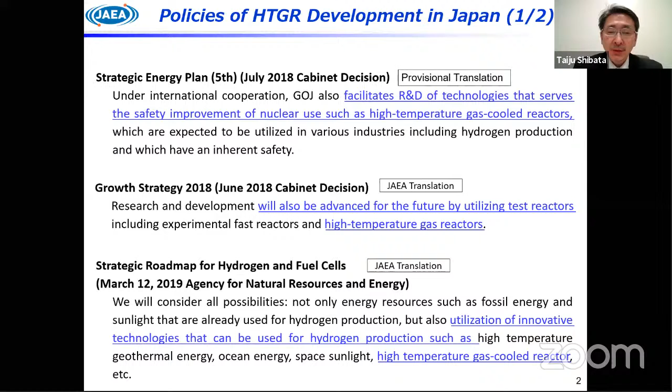In the long-term strategy under the Paris Agreement in 2019, IS process hydrogen technology is stated. The IS process is a thermochemical hydrogen production method by water splitting.

Progressive environmental innovation strategy in 2020. IS process hydrogen production and HTGR is stated for hydrogen production technology.

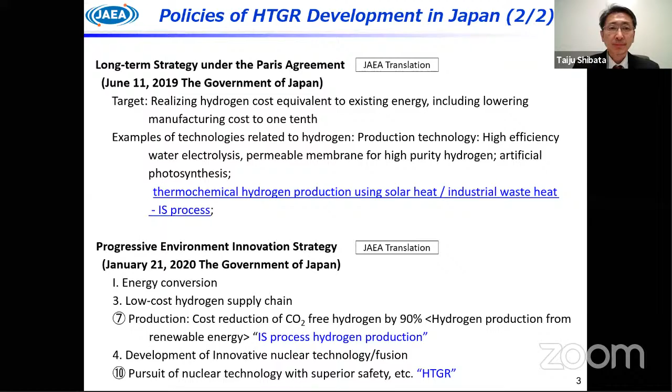This slide shows the role of HTGR in Japan. Compared to fiscal year 2013, the long-term goal is 80% reduction by 2050.

The bar chart shows the greenhouse gas emissions in Japan. It decreases gradually, but it is not enough. In 2018, the reduction is 12% compared to fiscal year 2013.

We need the breakdown of greenhouse gas emissions in 2018. 37% of greenhouse gas emissions come from power generation. 12% is from steel making. 18% is used also for steel making, transport, and chemical industries.

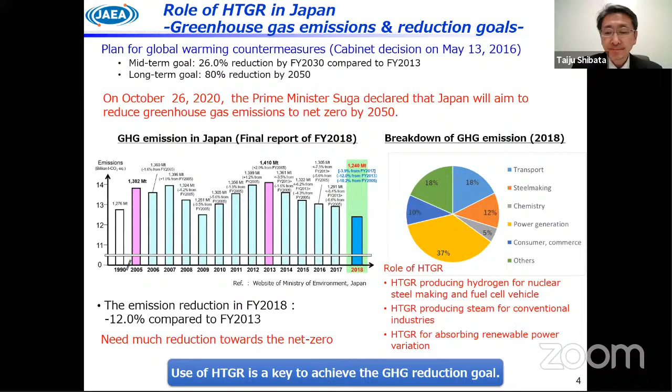Next, I will talk about the outline of the High Temperature Engineering Test Reactor, HTTR. The left side is a cutaway drawing of the reactor building, reactor pressure vessel, hot gas duct, intermediate heat exchanger, and reactor containment vessel. Major components are located underground.

Major specifications of the HTTR are shown in the table on the right. Thermal power is 30 megawatt. Coated fuel particles and prismatic block type fuel elements are used. Graphite is used for core components. Coolant is helium gas and reactor outlet temperature is 950 degrees C at maximum.

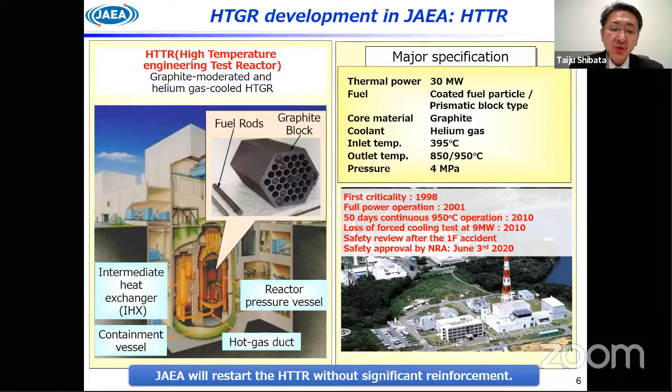History of the HTTR is shown in the next slide. Conceptual design was started in the late 1960s. First criticality was attained in 1998. The first full power operation was in 2001. In 2004, the first high temperature operation was done with coolant outlet temperature of 950 degrees C. It was the first experience of this kind in the world.

In 2010, 50 days of continuous operation with coolant outlet temperature 950 degrees C was carried out. Also in 2010, a loss of forced cooling test at 9 megawatt was carried out under the framework of OECD NEA International Cooperation.

As you know, in 2011 we had a great earthquake in Japan. The HTTR itself was not damaged severely, but after the Fukushima Daiichi accident, the regulation was changed. We need to pass the safety review following the new regulation to restart the HTTR.

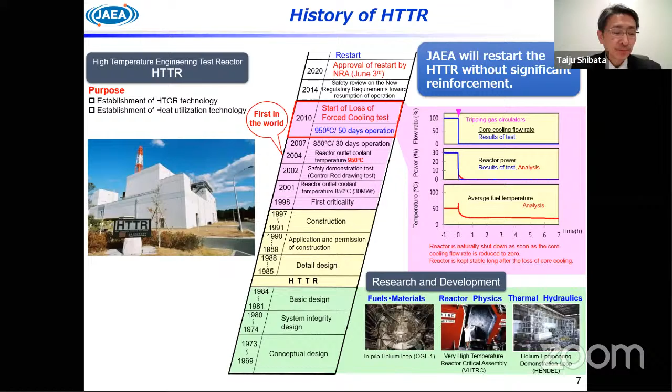This slide shows the safety review scheme of the HTTR. The new regulation standard was issued in 2013 after the Fukushima Daiichi accident. JAEA submitted the application for restart in 2014. After the review concerning the basic design and concept, JAEA obtained the permission this June.

Currently, we have other review processes concerning design and construction method and operational safety program changes. JAEA plans to restart HTTR operation in July 2021. After the restart, we will carry out the LOFC project under OECD NEA.

The experience of the HTTR licensing will be explained at the GIF webinar in April 2021. GIF is the Generation IV International Forum. So please join the GIF webinar in April.

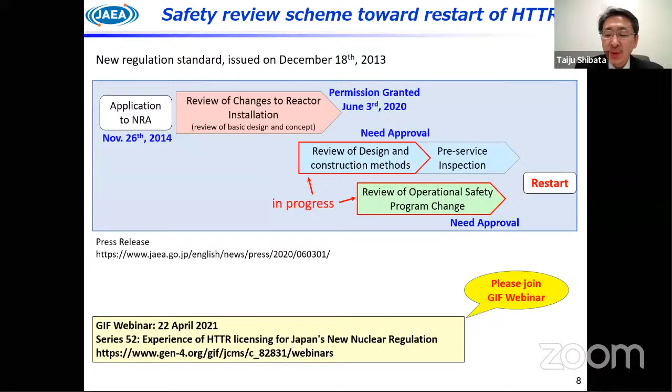HTTR was designed and constructed in cooperation with Japanese companies: Mitsubishi Heavy Industries, Toshiba, Ishikawajima-Harima Industry, Hitachi, Fuji Electric, Kawasaki Heavy Industry, and so on.

The primary coolant system was prepared by Mitsubishi Heavy Industry. The helium-helium gas intermediate heat exchanger was by Toshiba and IHI. The reactor pressure vessel was by Hitachi. Coated fuel particles were provided by NFI. Reactor internals were by Fuji Electric. And Toyo Tanso provided nuclear-grade graphite, IG110. The Chinese HTGR, HTR-PM, which is preparing for operation next year, also uses this IG110 graphite for core components.

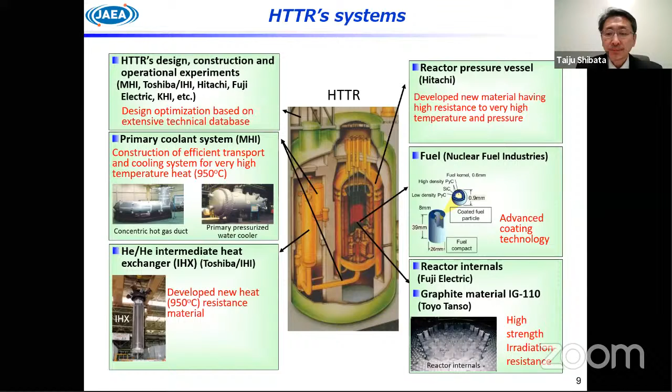Next, I will talk about progress of R&D and future plans. R&D on the HTTR project is composed of 4 major categories. The first is based on HTTR operation. JAEA has accumulated various operation data to be used for commercial HTGR design and operation. We will continue to carry out HTTR operation tests.

The second category is gas turbine and hydrogen production technology. In January 2019, 150 hours of hydrogen production by water splitting at a rate of 30 liters per hour was achieved.

The third category is commercial HTGR design. We have several commercial designs. The major one is GT-HTR300 with thermal power of 600 megawatt. The final goal of the HTTR project is a heat utilization test to be connected to the HTTR, targeting a demonstration test for safe and reliable HTGR heat application technologies.

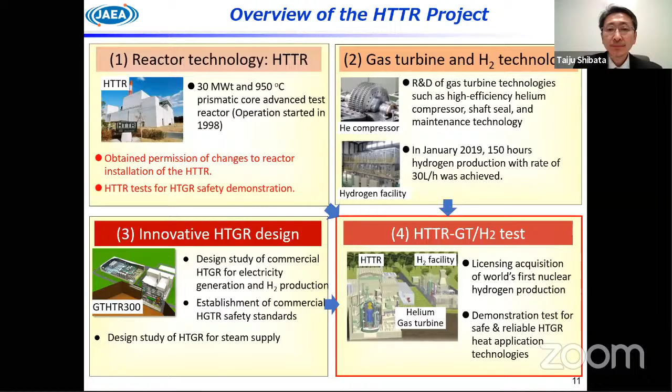We have a plan to conduct various tests using HTTR. Under the OECD NEA project, we already conducted a loss of forced cooling test at 30% power. At this test, primary coolant flow was stopped by stopping the helium gas circulators.

After the restart, we will carry out a loss of forced cooling test at 100% power. Then we will conduct the loss of forced cooling test in which not only the primary flow is stopped, but also the vessel cooling system around the reactor pressure vessel is stopped. It simulates the station blackout condition that happened at the Fukushima Daiichi plant.

JAEA has a plan to conduct many tests to confirm safety, core physics and thermal fluid characteristics, fuel and high temperature component performances, and so on, for commercial HTGR systems.

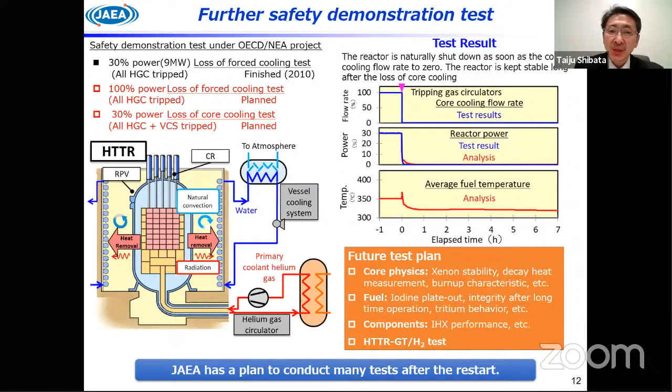Shown here is hydrogen production technology development at JAEA. JAEA has been developing a thermochemical water splitting iodine-sulfur process named the IS process.

The IS process consists of three chemical reactions. The input material is only water. To promote these chemical reactions, high temperature heat of 400 degrees C and 900 degrees C from the HTGR is necessary. As iodine and sulfur just circulate inside the system, the IS system only needs water and heat from the HTGR.

The major feature of the system is to produce hydrogen without emitting carbon dioxide. It can be said that the HTGR and IS system is an ultimate clean hydrogen production system.

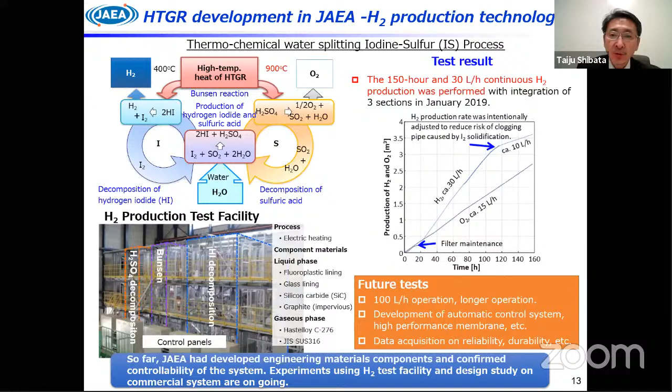A major feature of the HTGR system is the high efficiency of electricity generation. The efficiency of the gas turbine system is about 50%.

The HTGR hydrogen system produces a large amount of hydrogen, 85 thousand cubic meters per hour. The cogeneration system can provide hydrogen, electricity, and low temperature heat. It can be used for desalination and district heating. The heat utilization rate is about 80%.

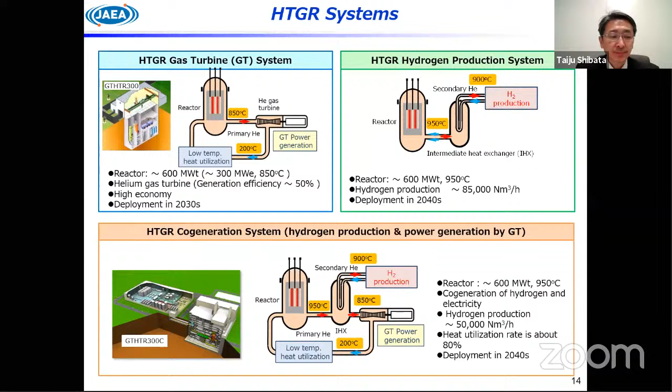We have a plan to demonstrate a heat utilization system, such as gas turbine and hydrogen production, connected to the HTTR. The purpose of the project is to get the world's first licensing for a nuclear gas turbine and hydrogen cogeneration plant, and to confirm operability and complete system technology.

The project plan includes design, construction, and operation of the HTGR gas turbine hydrogen plant; establishing a new licensing framework for coupling a gas turbine and chemical plant to a nuclear reactor; and demonstration of key technologies.

We have the HTTR, but we do not yet have the heat utilization system at this stage. We already finished the basic design of the system. Hopefully, JAEA can get funding for the system and start this project soon.

HTTR has the capability to conduct various tests for heat applications, and JAEA expects many countries would participate in the test program.

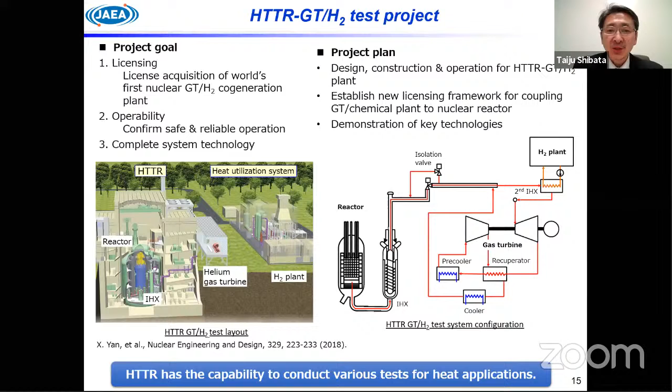We expect deployment of a demonstration reactor with gas turbine and steam reforming hydrogen production in the 2030s. We also expect deployment of a demonstration reactor with gas turbine and IS process hydrogen production in the 2040s.

Concerning key technology development, JAEA will carry out R&D using the HTTR. That is, operation of the HTTR to accumulate material and fuel performance data, and demonstration tests of heat utilization systems connected to the HTTR. Here, heat utilization system means gas turbine power generation, steam reforming, and IS process hydrogen production.

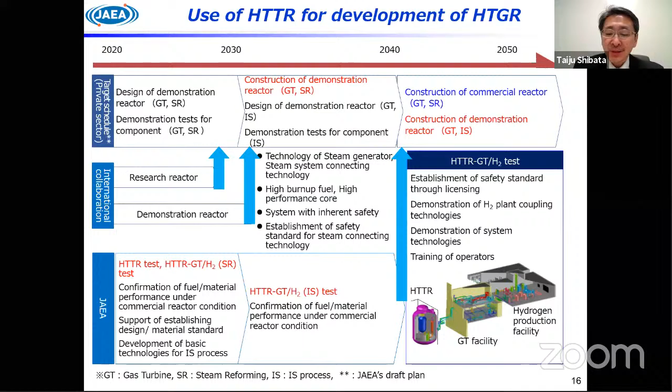Next, a summary of my talk.

Development of HTGR is stated in Japanese policies. HTGR is expected to be a promising system to reduce greenhouse gas emissions from the fields of steelmaking, transportation, as well as electricity generation.

JAEA obtained approval to restart the HTTR this June. The NRA confirmed HTTR resumes without major reinforcements due to its inherent safety features.

HTTR is the only reactor in the world to provide 950 degrees C heat. JAEA has a plan to conduct many tests to confirm safety, physics, and thermal fluid characteristics, fuel and high temperature component performance, and so on, for commercial systems after the restart.

JAEA also has a plan to connect a gas turbine and hydrogen production facility to the HTTR. JAEA drafted the development and deployment schedule of demonstration and commercial reactors. We are willing to provide our data and experiences through international collaboration under specific terms and conditions.

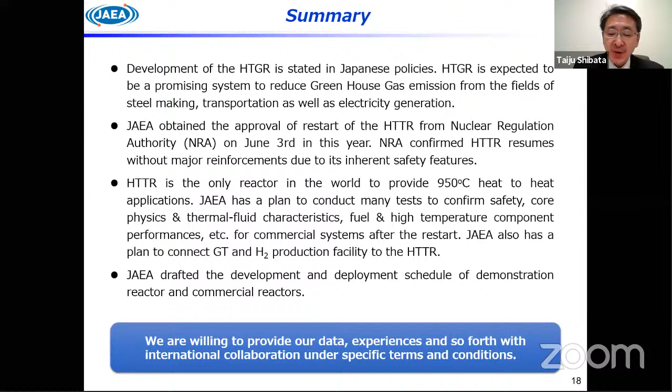That's all. Thank you very much for your attention.

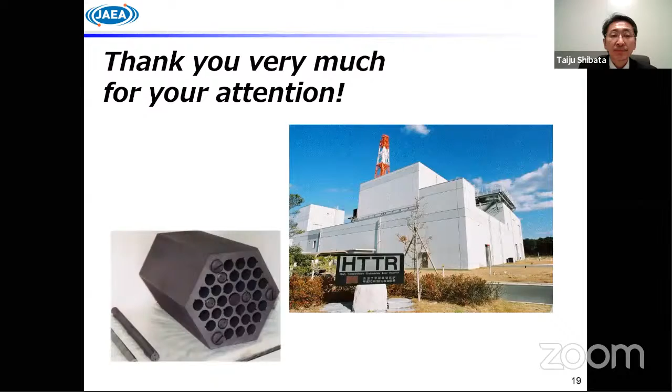Thank you, Dr. Shibata. Before we move to the next speaker, I have a small question: when do you think you will restart your HTTR? Our target schedule is restart expected in July next year.

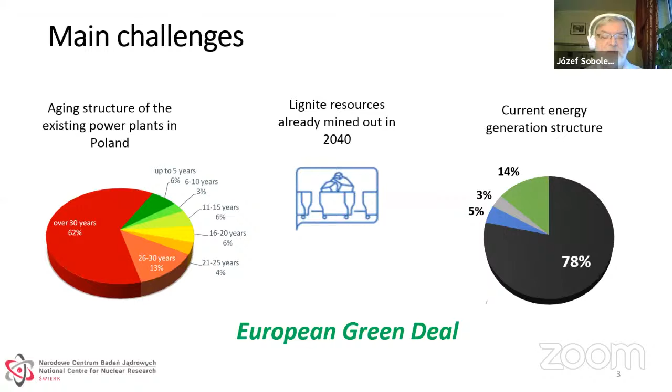Sorry, 2030 - I am not quite sure if it's realistic or not, because politicians sometimes think that the law of physics is something that does not exist. But we will see in the end. The situation now is that we decided to change the situation in the Polish industry, generation industry, because we are in Europe, we want to be in this community, and of course we want to achieve a better and more qualified life for our citizens.

We have now a project for the Polish energy policy to 2040, still not accepted by the government, nearly ready. Here you have the main objectives of this energy policy. Of course, the first is to provide energy security while ensuring the competitiveness of our economy, energy efficiency, and reduction of environmental impact of the energy sector. This is very important, but it's quite general.

Our long-term energy policy has, we say, 3 pillars. The first is just transition - that is very important due to our coal mining. Second is zero emission, and of course clean air, because in Poland - we are a North European, Central-North European country - sometimes in winter we have very hard winters and we need to heat. Unfortunately a lot of heating uses coal, and when individual people use coal for heat, the emission is not so much CO2, but there is a lot of simple pollution of the air. From the pollution point of view, we are a very dirty country in Europe, unfortunately.

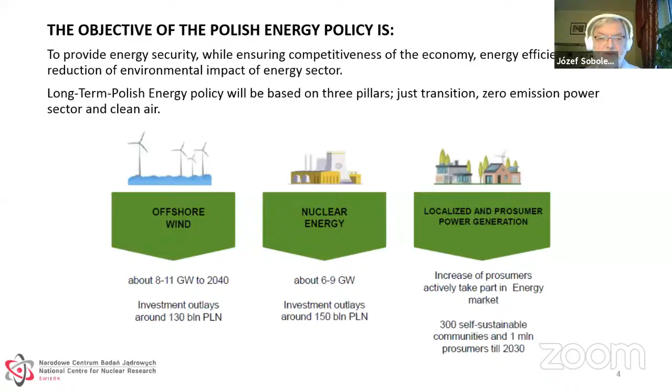Now, regarding nuclear - the Polish nuclear power program, which I told you was established 10 years ago, was updated 2 months ago due to some delays and decisions that were made. Previously, it was fully open to Generation 3 or 3+ nuclear technology. Now we decided first to define how much we want - between 6 and 9 gigawatts of installed capacity - based on proven PWR-type reactors. This is the decision, because previously we were also talking about CANDU and BWR. Now we are talking only about PWR.

Why PWR? First, of course, because these reactors have a relatively good history.

I have some disruption again. Okay, it's okay now.

Okay, then the rationales for this decision are that first, of course, we are diversifying the electricity generation base. We need to replace the old coal power plants with something that is zero emission, but it's very important that they are dispatchable sources. We are looking at the Germans. They have installed power three times bigger than they need at maximum. But the problem is that renewables, in real-world production, deliver below 40% of the energy in this country. And we are looking at this and trying to learn.

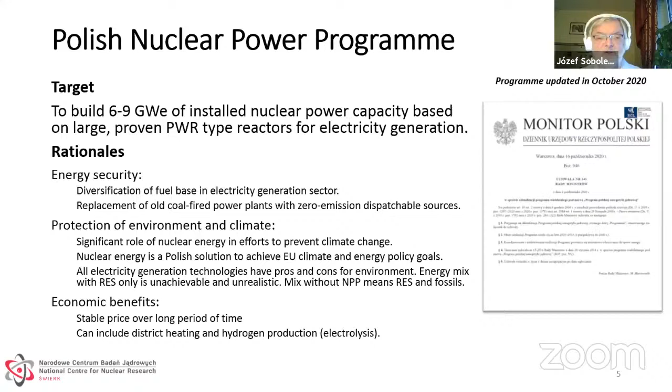And we are also thinking about some additional use of this nuclear power program for district heating, because we have a lot of district heating in Poland in cities. And for the future, of course, on top in Europe is the hydrogen strategy, that means hydrogen production, especially at higher temperature, also using the heat from the reactors, which makes the electrolysis more effective.

Okay, these are the key elements of this nuclear power implementation that I started to tell about. First, we decided that the project company that will build the Polish nuclear power sector will be state treasury owned with a strategic co-investor. But the strategic investor should also be connected with the technology supplier. And there will be one technology for all reactors. There will be no different reactors. Whoever we decide will be our partner will have the opportunity to bring to Poland maybe 9 gigawatts of nuclear power.

Why this technology? Why the larger PWRs? First, there is the most extensive experience in construction and operation of these reactors. Looking at radiological accidents, they have some history, but it is not as crucial as in other types of reactors. This is also important, especially at the level of the citizen. And there is also reasonable common knowledge of PWR technology among regulators, which is important for us, because we are quite inexperienced generally.

And of course, PWRs have a smaller emergency zone. Poland is a country where we do not have so many empty places where we can put a reactor without neighbors around. And there is also a competitive supplier market, which is also important. We now have the United States, Japan, Korea, and France, so we can make a choice.

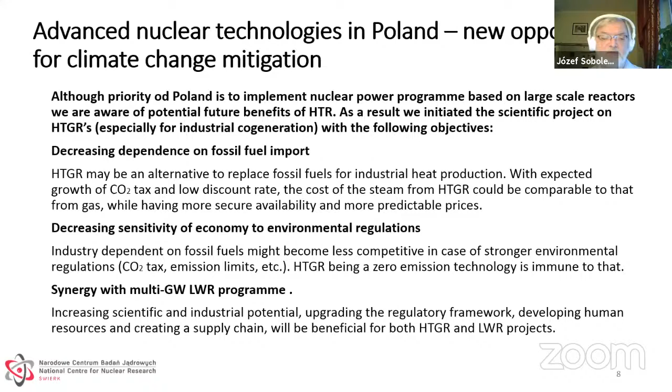And here on the right you have a small map with these industry sites. And here in this simple picture you see how it is now. Some of these companies are quite big. They're using standard, more or less 160 megawatt boilers for gas or for coal. And at first, we want to go in the direction of replacing all coal boilers with HTGR, and using the gas boiler as a backup, and also as something additional that we can use depending on the needs of the companies.

Usually the chemical process is the one place where we use this steam, but these big companies also produce their own electricity. Quite simply, it is cheaper. Our first target when we are talking about advanced nuclear technologies and HTGR is industry heat. Of course, the secondary target is hydrogen production, because most of these companies also need hydrogen for the production process. In the same place you can generate heat, but you can also produce hydrogen for the chemical processes.

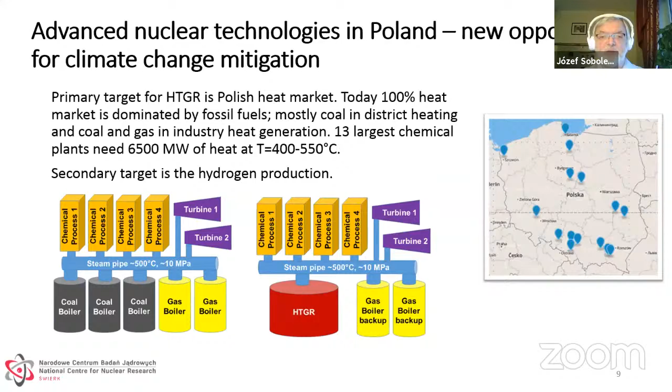Okay, what is the status? We started this discussion in the Ministry of Energy in 2016. I was at the time the director of the Nuclear Energy Department. First, we appointed a committee for deployment of high temperature nuclear reactor technology in Poland. It was in July 2016. It was very interesting because this committee was over 20 people from different positions, from different places. There were people from science, from the banking sector, from industry, from security, and also from the regulator as an observer.

A lot of people from the Polish economy discussed over 1 year. Working together, they published a very interesting report about the deployment of high temperature nuclear reactors in Poland, here on the right above. This is also available on the Polish government pages in an English version. It's very interesting. And it led to some decisions. The Minister of Energy accepted the report and took note that this is not only desirable, but more or less required for our future. He also requested to prepare the future steps for the deployment of HTGR reactors.

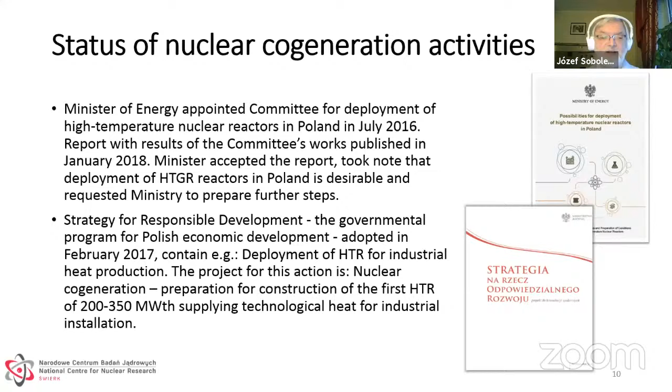There was also a decision that these high temperature reactors will be HTGR, high temperature gas cooled reactors, because there are a lot of high temperature technologies. What was also important, we have a very important paper in Poland, the Strategy for Responsible Development, finally adopted in 2017, also known as Plan Morawieckiego. Morawiecki has been the Prime Minister of the Polish government for 5 years now. This is important because anything innovative, politically, needs to be in this strategy to be deployed. It was not easy, but it was finally accepted. The deployment of HTR for industry heat generation is in the Strategy for Responsible Development. It's very important for us.

Okay, then, having this situation, we started some real work around HTGR. We looked and discussed with different companies and different countries. We also visited different countries and locations with HTGR reactors.

Okay, we visited not only the United States but also Japan, China and Korea, looking at what the people have, to come to a decision on what we want to choose in the end.

And in 2020, we also established in Poland a Center of Excellence, NOMATEN. There's joint financing support from the Foundation for Polish Science and the European Commission. NOMATEN should focus on the study and development of new materials, specifically materials designed to work in harsh conditions: radiation, high temperature, and corrosive environments. And of course, everybody knows at this moment that high temperature technology is the first target of this Center of Excellence.

And they also saw that the Minister of Entrepreneurship and Technology put the HTR technology on the list of national smart specializations. It is very important because it opened the way not only for internal financing but also for aid from European funds. And okay, we hope that we can get something from this side as well.

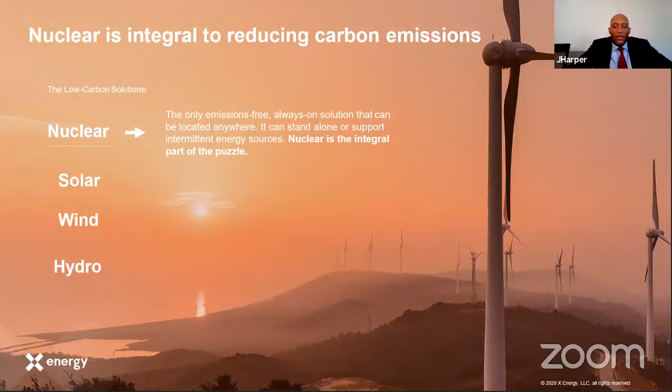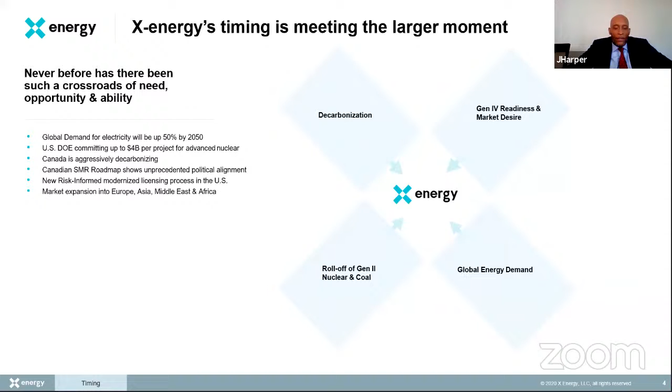Not just North America, but they're global. Our nuclear optimism is at X Energy. For those of you who are not familiar with X Energy, basically three different projects. Our reactor, 100 megawatts, for 320 megawatts, that would be our standard, each 80 megawatts electric. Call that the XE-100.

Then we have the XE Mobile, which is really focused at the defense industry, and it is a microreactor at 1 megawatt electric. We also have a commercial fuel facility, which produces the TRISO fuel in the pebble form.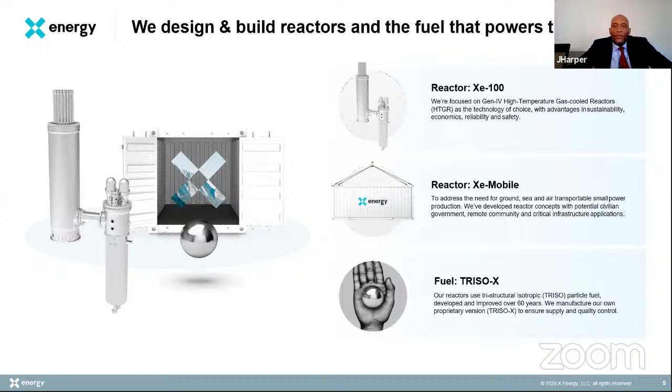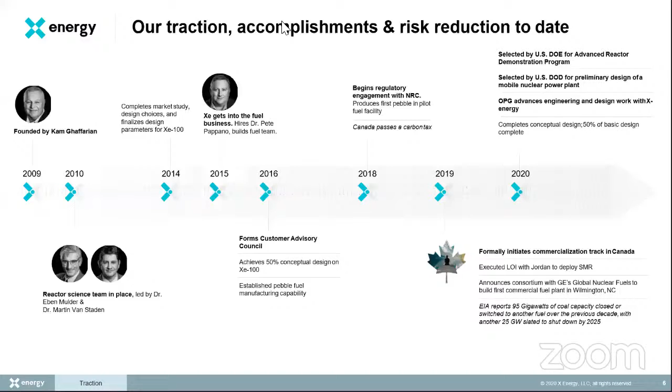I produce back here. So try... okay. Can everyone hear me? Okay. Again. Okay. Oh yeah. Actually, my turn to have difficulty, right?

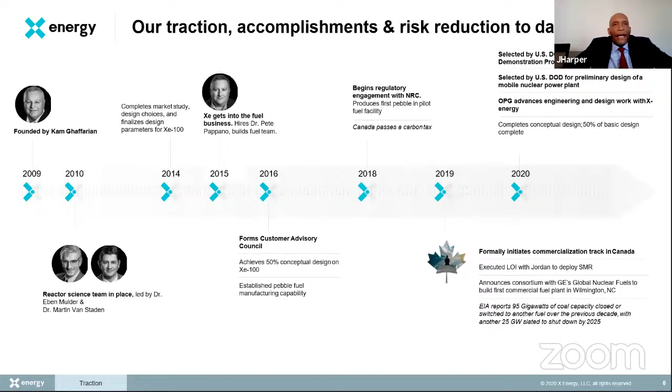Kam Ghaffarian started X Energy... global... on key technical... so we were selected with that award. They were funded, also chosen by OPG, down selected... our XE-100 at the Darlington nuclear power station. Actually, close of last year. Conceptual design... deploying a reactor this decade. We were able to execute a letter of intent with Jordan for an XE-100 project.

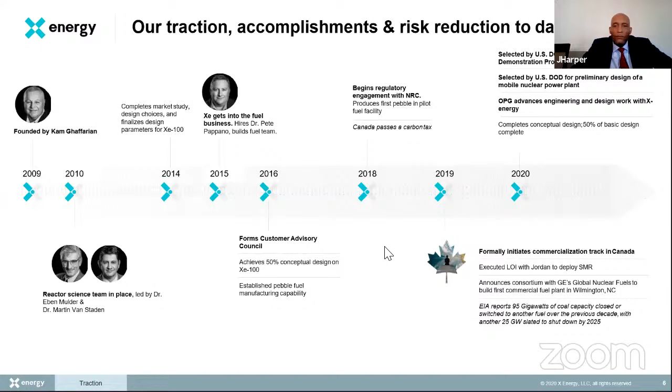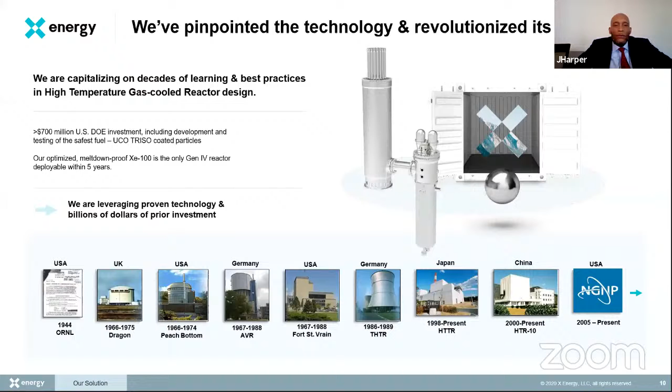So, quick word about the leadership. Most of us have more than 30... very capable... that we can achieve the goals that we set out to achieve... our current leaders look at retirement... Chinese and where they are with their programs... as soon as practical. That's really what our goal is... TRISO fuel particles to UCO particles... 200 megawatts.

320 megawatts. We did a lot of market research for this technology, as Dr. Sobolewski mentioned, is that we can get process steam, in our case 565°C, but it opens up a number of applications: water desal, district heating, petrochemical industry applications that we are looking at. Also, this technology is able to load follow, which again, as I mentioned, the all above strategy with power sources.

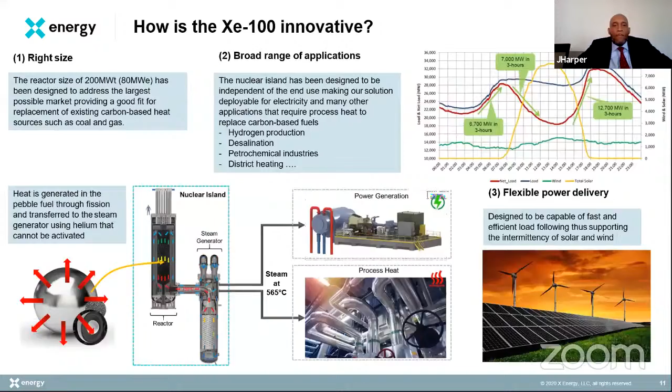Wind, hydro, and solar, we're able to load follow at 5% per minute. Our reactor ramped from 100 to 40%. So again, this is really a game changer.

The fuel itself, the TRISO fuel, is the basis for our safety case. There's a lot of history here with this TRISO fuel, so it's well tested, well proven. We are looking at high burnups.

168,500 megawatt per ton. We're looking at just a super robust fuel. We're looking at about 19,000 of these TRISO fuel particles, which you can look at almost as independent containment. We're able to keep 99.999% of the fission products within these particles themselves.

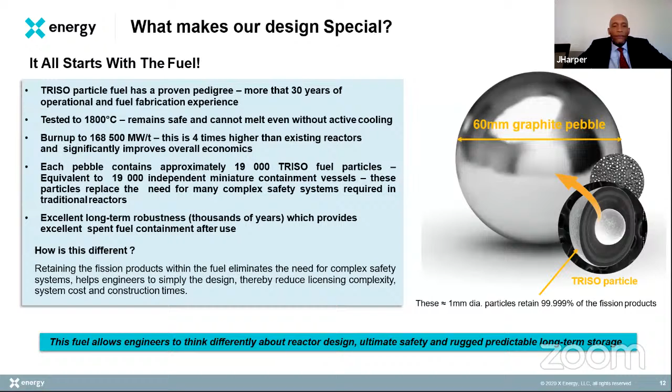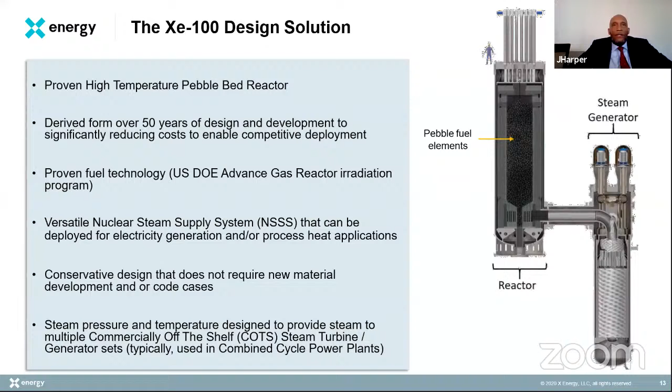You see the person up there with the reactor and the steam generator there. Just to say that X-Energy uses multiple commercially off the shelf components, especially primarily on that side, and we're just very excited about bringing cost and time out of the plant.

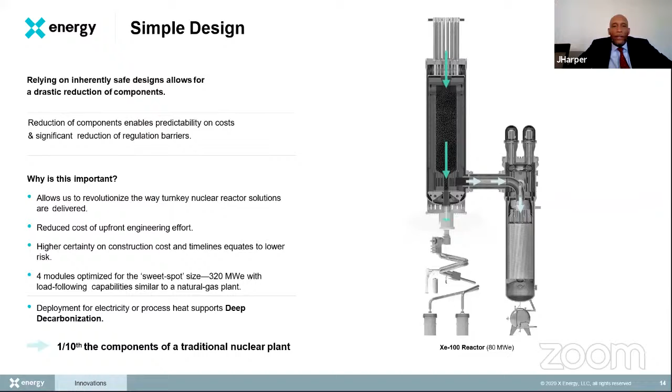Where we are with our generator, the helical coil steam generator design, and the 60-year design life, and again we'll talk about the high quality, proven materials, well-known service life.

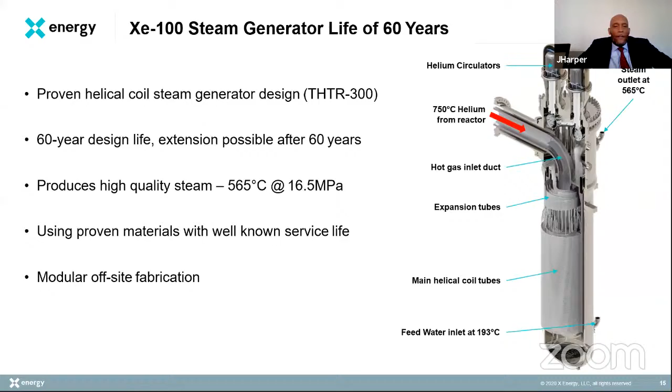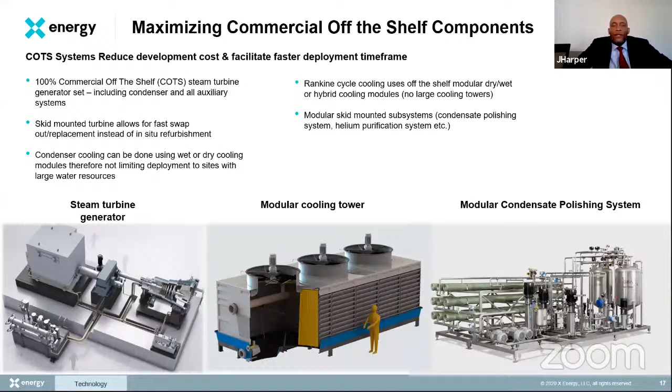Just to reiterate, the balance of plant, and again, we're trying to look at how to deal with traditional issues and problems that you have in constructing these nuclear power stations. So this modularization is dealing with that.

We are looking at, from a deployment point of view, an Integrated Product Facility. Components will be shipped directly. They would be road transportable and can be shipped directly to the site, either by sea or road transportation. And then we're looking at, obviously, other items and components like graphite blocks, pressure vessel heads.

You'll basically store those there and ship them there and make them ready. So you'd have your TRISO fuel, the commercial fuel facility that X-Energy would be running, and again, fuel facility directly to the site.

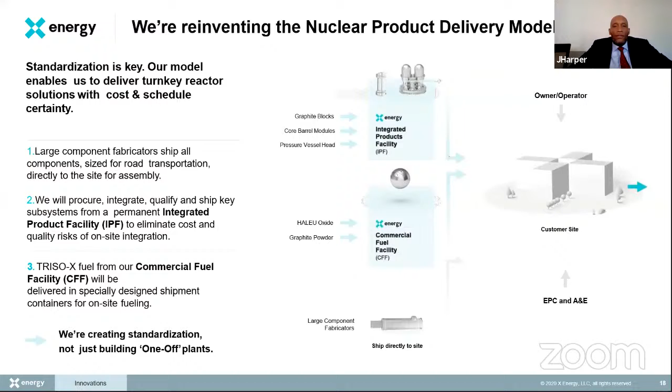Here's just an artist rendition of the actual one module, and you'll see the reactor being below ground there. You have the reactor auxiliary building, and then the turbine, so your conventional island.

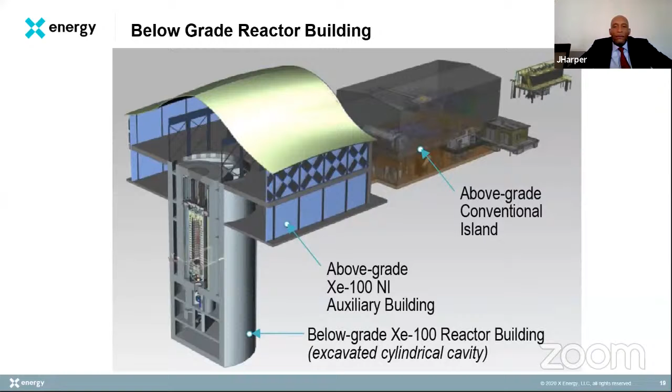And again, this would be an overview of the standard plant, whereby you have four of these modules.

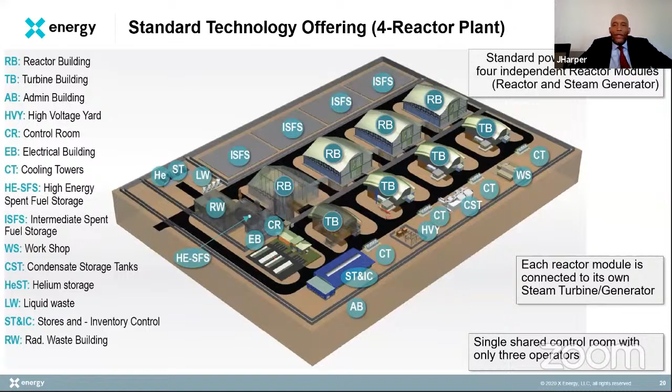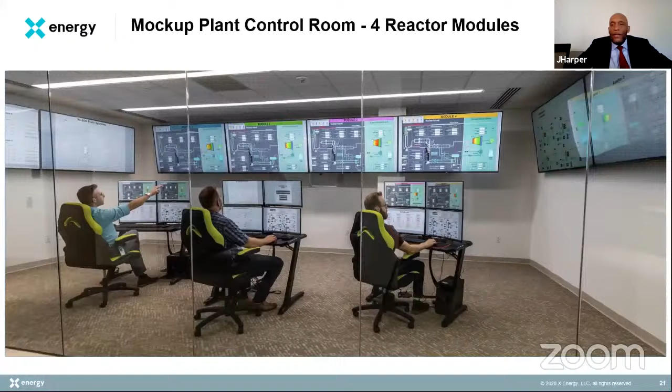At our facility, and you all are welcome to come when this COVID subsides, we have put up for our standard plant. We are looking at having just three control room operators.

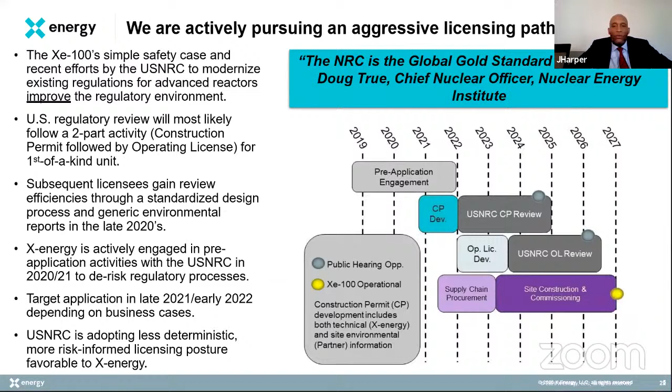Markets right now for the first of a kind is in North America. In the U.S., I mentioned up front, we have the Department of Energy's ARDP program, the Advanced Reactor Demonstration Program. We are looking at deploying our XE-100 in Washington State with Energy Northwest. That facility will be really not far from the current Columbia Generating Station. So we picked a site there. 2027, again, is the deployment date that we're looking at.

Also in Canada, I mentioned earlier, we're looking at the Darlington site there, where the date of deployment is 2028. We've been chosen for consideration along with GE Hitachi and also Terrestrial Energy. OPG is to make a decision approximately next year as to who they will go with for that particular project.

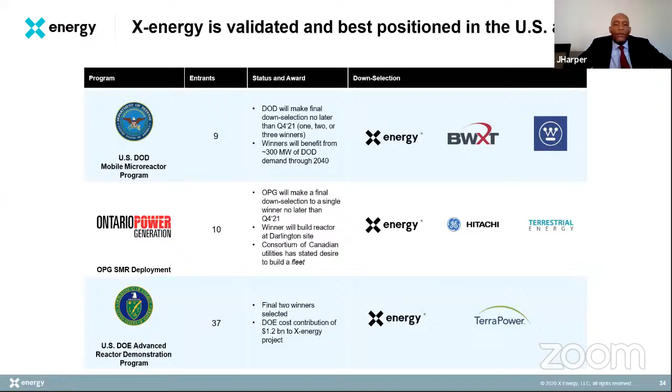OPG, I just mentioned OPG. Out of 10 major competitors, there was ourselves, GE Hitachi, and Terrestrial. We're looking for a decision next year on the Darlington site. Canada fully expects to build and deploy a fleet across Canada. As for the DOE demonstration program, there were initially 37 competitors. The total project cost for us is about $2.4 billion, so DOE is expected to contribute $1.2 billion, and it's ourselves and TerraPower who are the competitors.

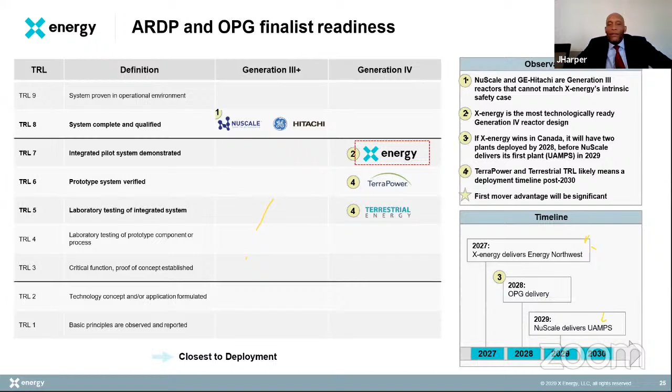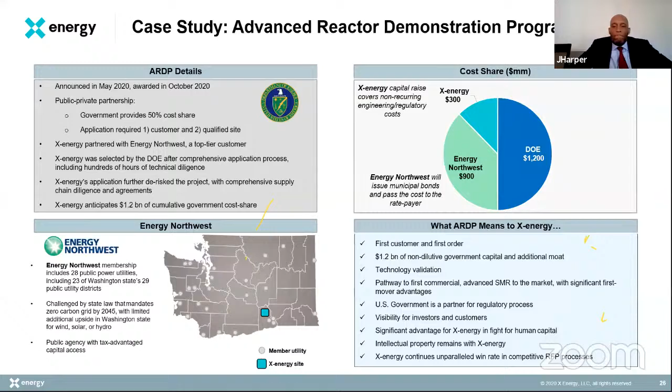So I think that pretty much concludes my talk. Apologies in advance if the technology fouled us up here, but hopefully you were able to get something out of what I've offered. Thank you.